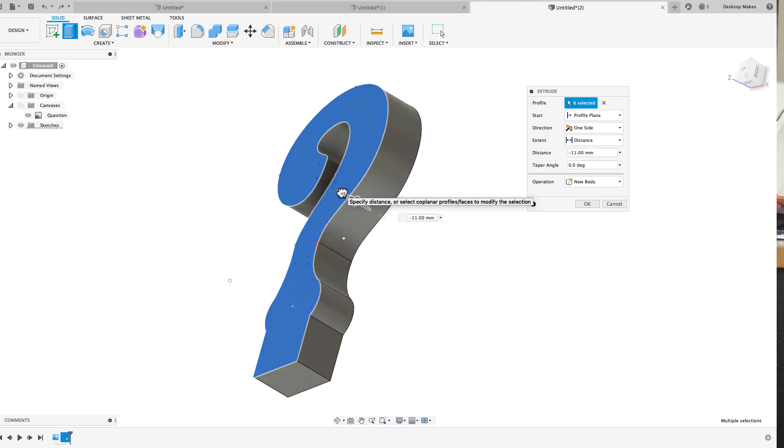Now I'm trying to figure out what to do, and then I realize, wait, I have a 3D printer, and I can definitely design one of these. So I buy a cake, go home, fire up Fusion 360. It literally takes me 5 minutes to make the question mark design, and an hour later, I'm holding it in my hand. It looks way better than what they would have had at the store, and I was able to print it in colors that matched the cake.

And the sweet bonus is that I made it. And if you've been there, you know that exact feeling. I love this project because it's a great example of how my 3D printer has saved me countless times. And I have so many stories like this. All right, let's go into the design and I'll show you how I approached this and how I was able to print it in 2 colors with a printer that only has 1 extruder.

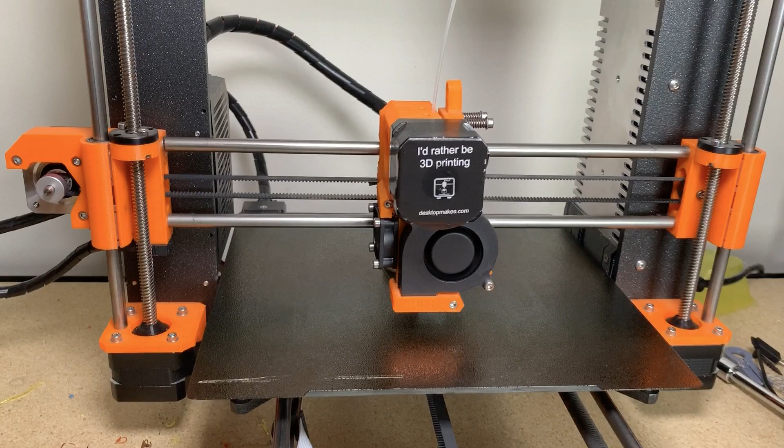I printed this with my Prusa i3 Mark II, and as you can see I went with the clear filament for the first part, and I'm going to come in with the orange for the second part. So the printer head's going to move out of the way, and then it's going to unload the old filament, and I'll just put in the new filament and hit the OK button, and it'll purge some of it out. And you just have to make sure to come in and clear the rest of the filament so it doesn't drag it back to your print.

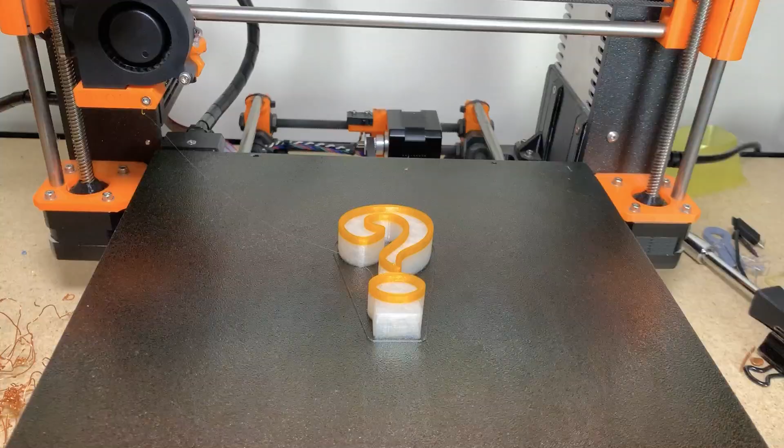And then it just continues, and it does a really good job of just picking up where it left off. The beeping you heard before is what it uses to notify you when it's ready for a filament swap. So it'll keep beeping until you actually come in and change the filament. Here's the finished print, and I really do love these flexible sheets that allow your prints to just pop right off. Makes life so much easier.

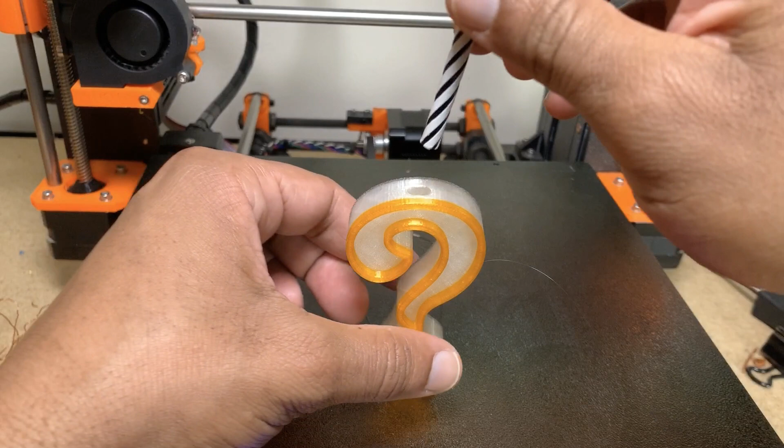And as you can see, I modeled this with the little hole on top, so then you can just come in with a regular candle and place it on top. And this has already gotten me thinking of all sorts of creative and funny ideas for candle designs instead of what you usually see out there. All right, let's jump into the design now.

I find it's a lot easier to approach these types of designs by bringing in an image and tracing it rather than just trying to tackle it from scratch. So what I did is I went on Google, found the image I wanted to use, and then just saved it to my computer. So now all I have to do is go to Insert, Canvas. I'm going to go to Insert from my computer, and it'll go to my folder. If not, just navigate to the right folder. I'm going to select my image and click Open.

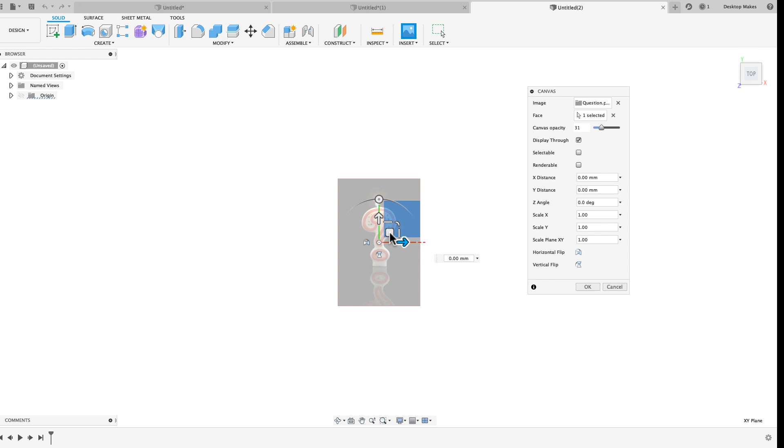And now all I have to do is select the face. I want this on my XY plane, so I'll select it. And let's go to a top view so I see what I'm looking at. There's my question mark here. I'm just going to move it about over here. The only thing I changed here was just to bring that opacity down to about 30. Somewhere in the 30s is fine. And then I'll click OK.

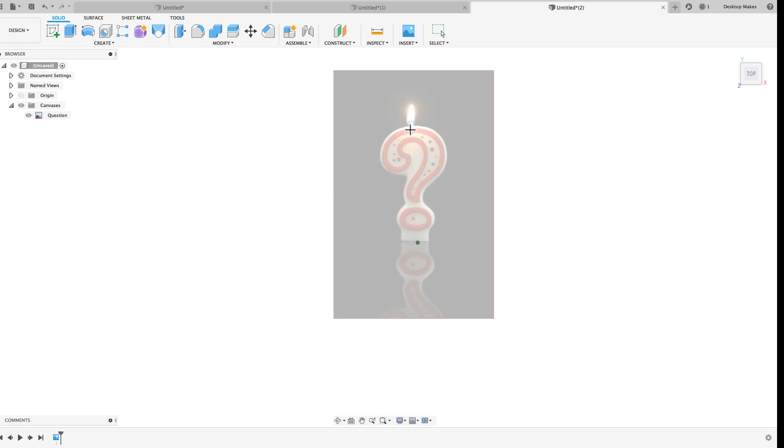And now I have to calibrate it, so I'm going to expand it here on my browser. Right click, go down to Calibrate. And I'm just going to select the bottom and the top and enter what I want that to be. So I'm going to go with 80 millimeters, hit enter, and then let's zoom out. Okay, I'm going to turn on my origin here to see where it is, and I'm just going to move it a little bit.

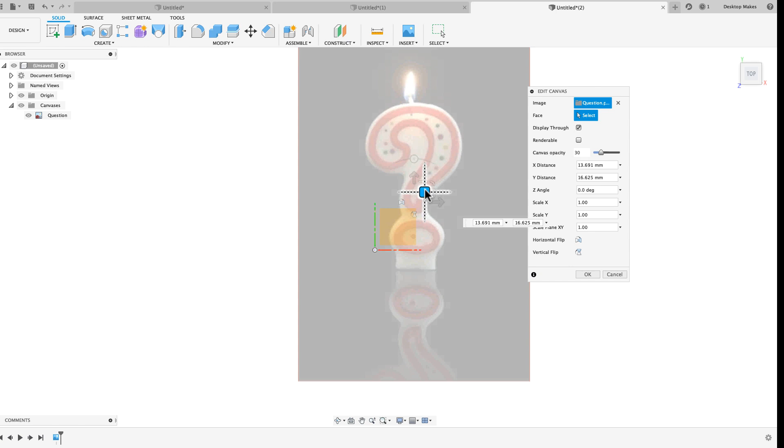So I'm going to right click on my canvas here, right on that image, and I'm going to go to edit canvas, and then I can just grab it. I'm going to position it about right here, just so it's on the upper right hand quadrant here of my x-axis. All right, I'll click OK, and now I'm ready to begin sketching.

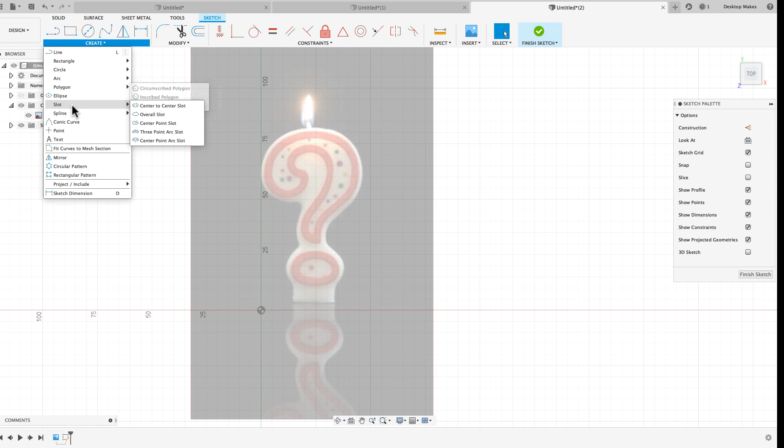So I'll go to Create, Create Sketch, select that XY plane, and I'm going to grab my spline tool and simply trace over the question mark. So let's go to Create, Spline, Fit Point Spline, and I'll zoom in a bit. And I'll just start around right here, and I'm just going to place points just on major curves.

And you've probably seen me use the spline tool before. You know, it's one of those things that you really just have to start using it to get the hang of it. But you can see that once I click back on that first point, it closes that profile. So if I hit escape, I have this profile here. And now I can go in and tweak these points. So I can grab them and move them.

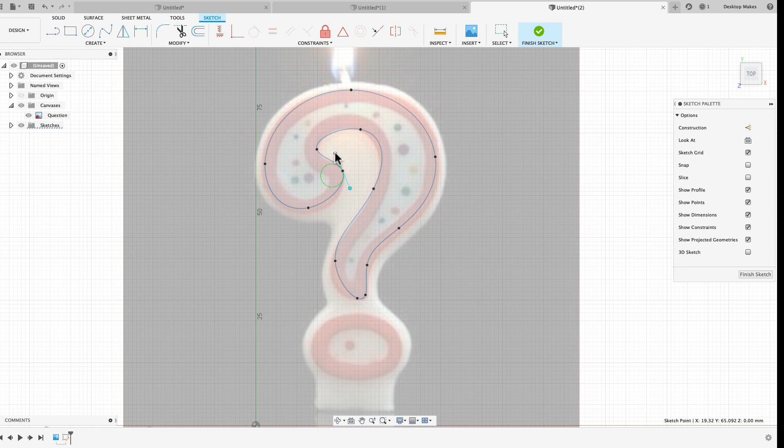And if I click on it, I get these handles. If I want a sharp edge, I could just bring that handle close in and it gives me a sharper edge there. And then I can just go around tweaking these. So I'm just gonna move these around, just getting it to match the profile. Now it doesn't have to be perfect. I'm not looking for perfection here, just to get the general idea. So I'm not gonna go too crazy with it.

Here's a tip: if you find that it's snapping into different points or to your grids, you can hold the Command or the Control key, Command on a Mac, Control on a PC, and it'll give it the smooth movement you see here so it can stop it from snapping.

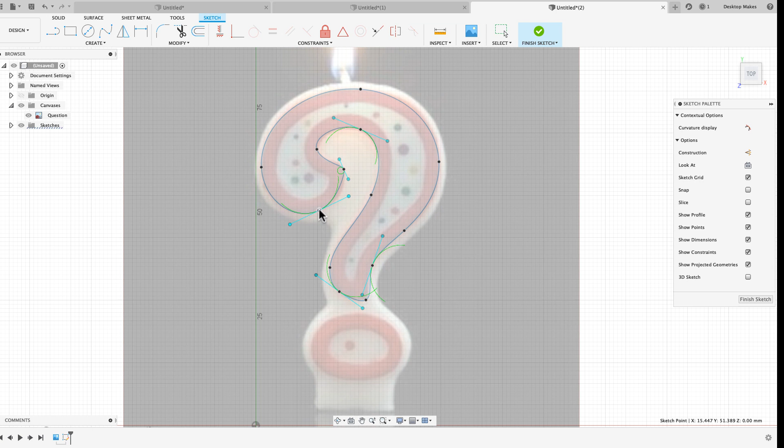Okay, once I'm happy with this overall shape, let's go down to the circles here. And to create those, I'm just gonna go with the ellipse tool. So create down to ellipse. I'll eyeball my center point here and then just move my mouse up to give it my height and then out to give it my width. Hit escape, and then you can actually come back and adjust these points here.

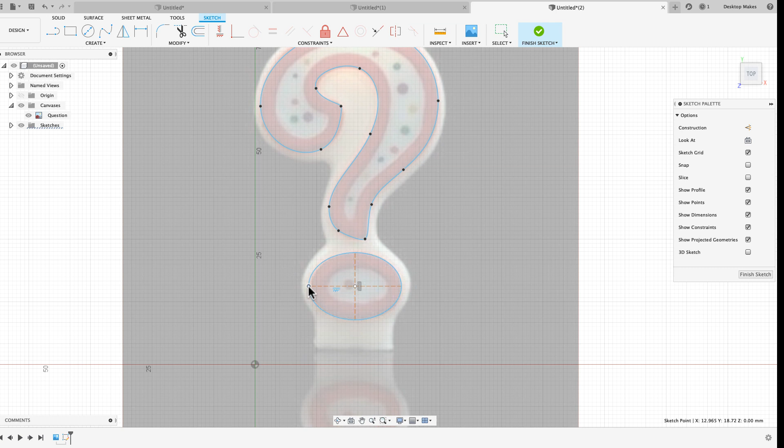Okay, now that I'm happy with the overall outline here, I'm going to grab my offset tool by going to modify, down to offset, click this top outline here. I'm going to give it a 2.5 millimeter offset, and there it goes. I'll do the same thing with the bottom here. Right click, just go up to repeat offset, click the ellipse, and you can see if I start dragging it in, it's a negative offset, so I have to make sure to enter that negative number, negative 2.5. There we go.

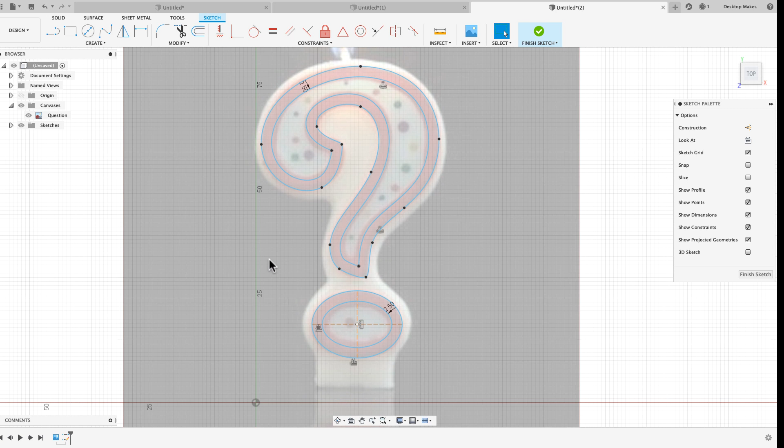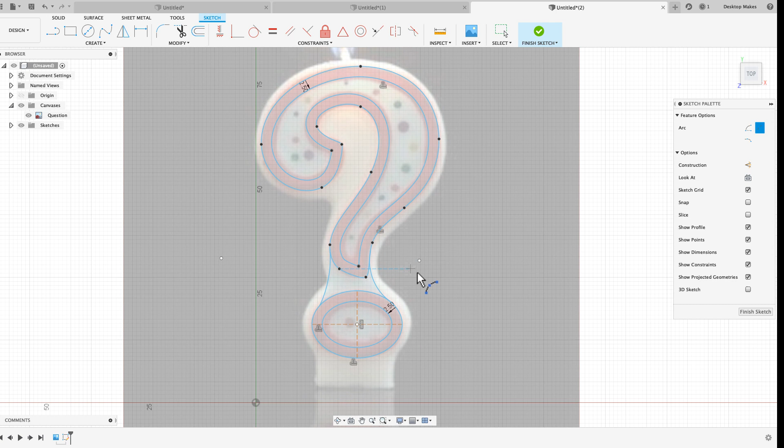Now I'm going to take a different approach. Instead of this whole white part around the question mark, I'm going to simply attach the top to the bottom part using a couple arcs. So I'll go to create, down to arc, 3-point arc, and click on the ellipse here. Let's see, grab a point here and then a point right here on the question mark, and then I'm just going to bring that in a little bit and do something like that. Do the same thing on this side. And that's fine.

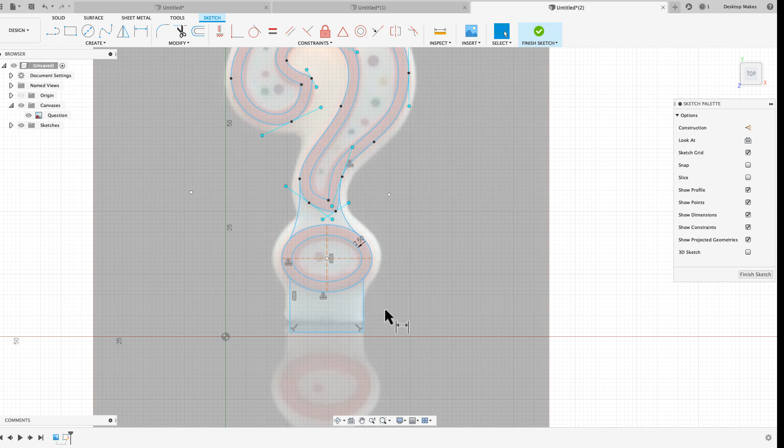And now I'm just gonna do the bottom part. This is the part that actually goes into the cake. So let's grab the line tool, and I'll just grab somewhere over here, come down, go across, and then back up. Okay, now I have that little rectangle part that's going to actually have it sit. Let's hit D, and I'll check the distance on this. It's about 13 millimeters, so that's good enough. Okay, so that's pretty much what I need here.

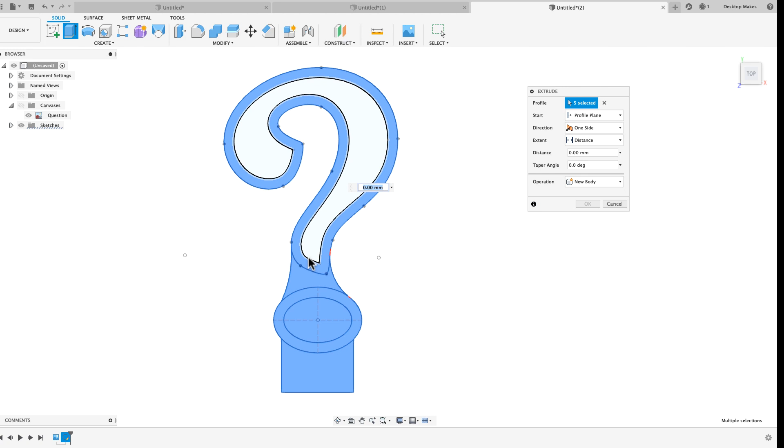So I'm gonna go to stop sketch, and I don't need to see the canvas anymore, so I'll untoggle that visibility. E for extrude, and I'm gonna select each one of these profiles, and then I'm gonna extrude this down. I went about 15 millimeters, so I'll do negative 15 there. And let's bring back the visibility of that sketch. And E again for extrude, and this time I'm just gonna choose that outline, and I'm gonna extrude in the other direction.

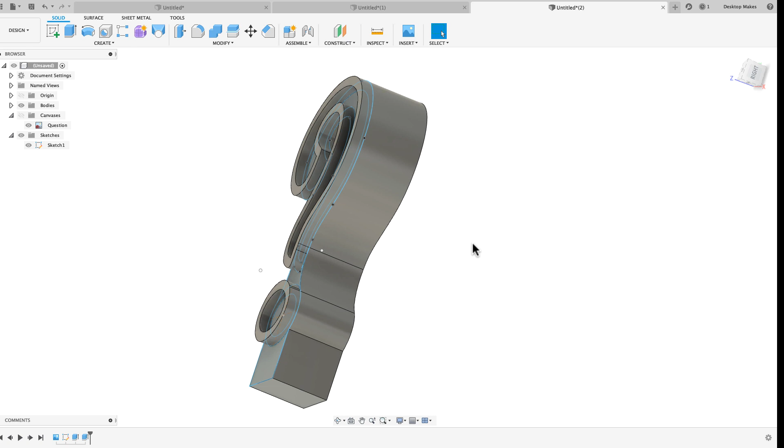We'll go 3 millimeters and click OK. Let's remove that sketch again, and there is our question mark. Now to print this, I want to do it in 2 different colors so that the outline here can actually stand out and we'll see a question mark. So let's make it look like how we're going to actually print it.

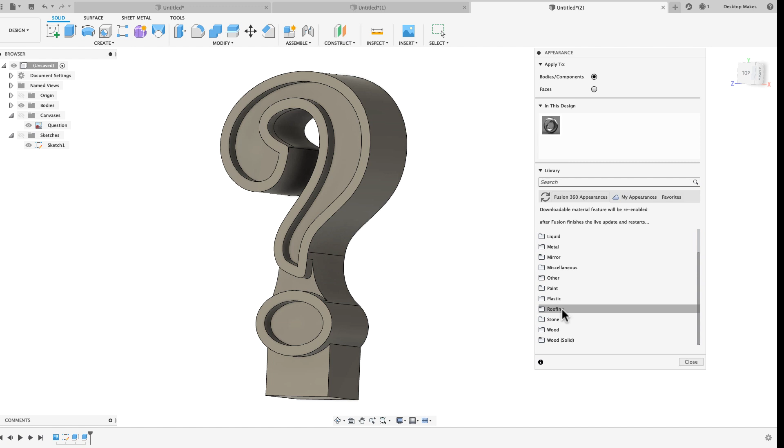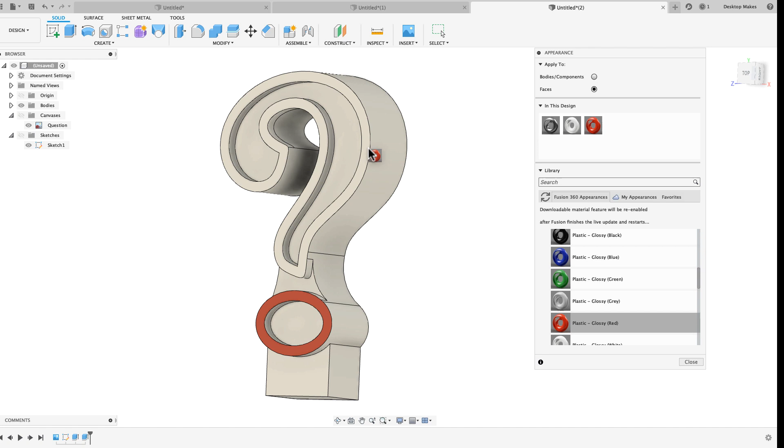I'll hit A on my keyboard for appearance. I'll get this appearance dialog box. Let's go down to plastic, and I'll click on the glossy folder here. I'll grab a white, and then I'm going to grab a red, but I just want this top face to be red, so I'm going to change this from bodies to faces, and I'll go ahead and drag that over. So it's going to look something like that, and actually the inside part is also going to be red here.

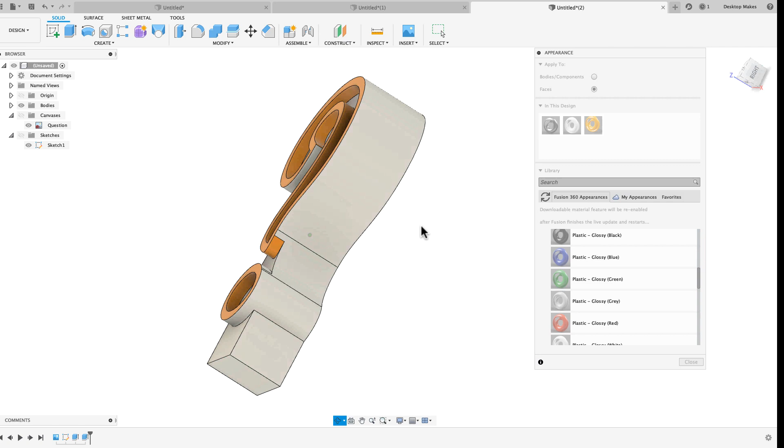Okay, then I'll double click up here on that red. I'm actually going to make it orange because that's the color I'm going to make it, because we're doing a carrot cake. Okay, and it's going to look something like that. It's a little bit different because this whole part here would be a different color, and I can tweak that right now by using my split body tool to make it more accurate, but that's going to give the general idea of how I want this to look. So, all right, now I'll show you how I'm actually going to set it up in the slicer.

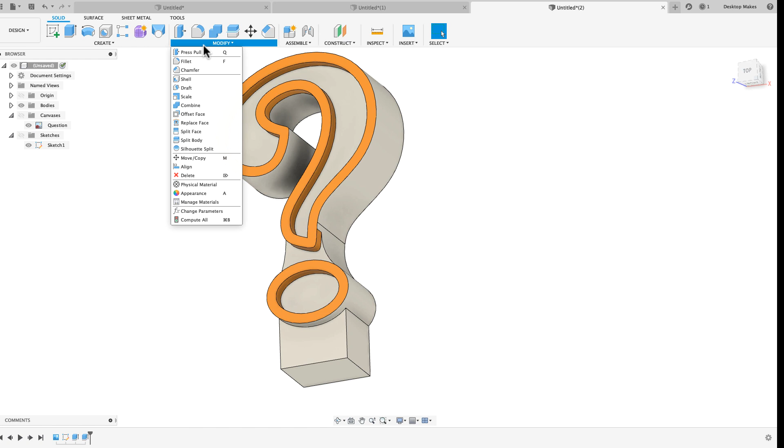Actually, before I do that, let's apply a fillet to these bottom edges here. I'll go to modify, down to fillet, and I'll select this edge here, and you know what, let's do these 2 as well. So these 4 total edges, and I'll do a 1 millimeter fillet, and then I'll click OK.

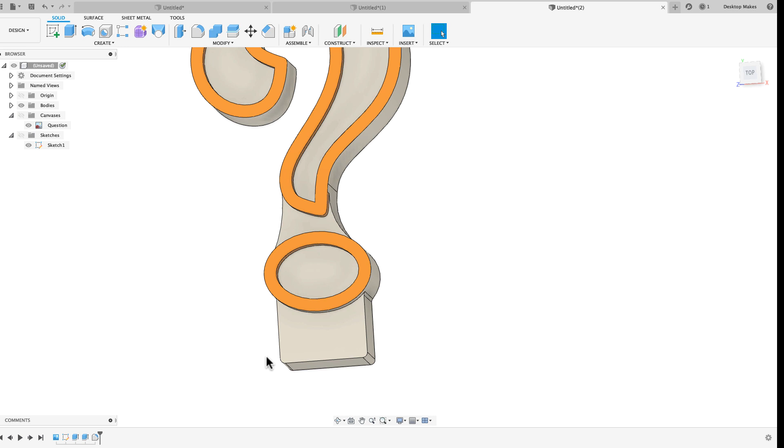Now the reason for that, if your model can allow for it, is when you're 3D printing you won't have these abrupt changes. It just allows for the print head to move smoother if you put these fillets in here. So it's just kind of moving and not having to stop and then turn. It'll allow for just better results.

I realized that I forgot to put our hole on the top where the candle is gonna go into. So the idea behind this design is that we're gonna have a hole on the top, and you're not gonna actually light this 3D printed part. You're gonna put a regular candle on the inside. So, all right, let's do that really quick.

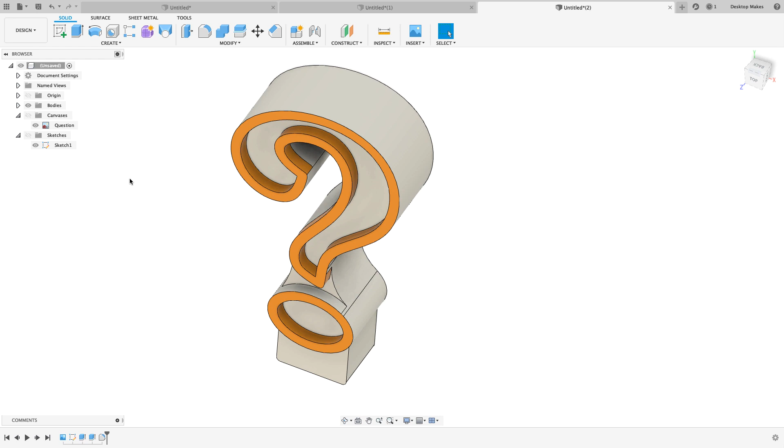I'm gonna start that by creating an offset plane. So I'll go to construct offset plane, and I'm gonna grab this ZX plane here. I'm going to take that arrow and just drag it up right on top of my model here. So bring that down just so that it lies right above it. Click OK, and then we'll create a sketch right on that plane. And we're right on top here.

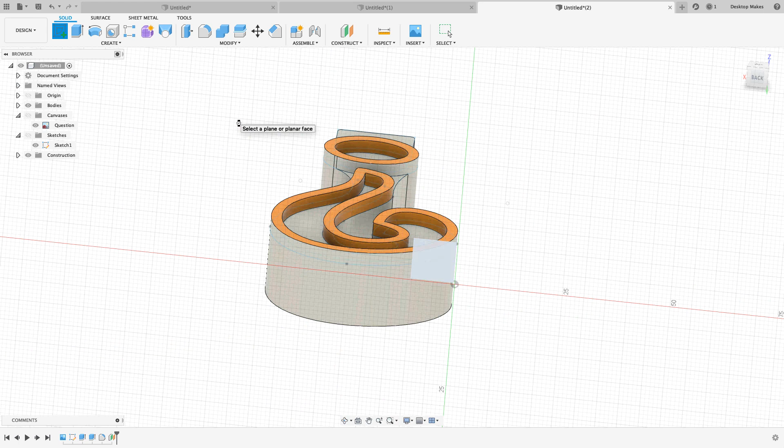So I'm going to hit P on my keyboard for project. And within this little dialog box, I'm going to choose bodies, select my body, click OK. And I'm going to draw a circle. I'll go to create and then we'll go down to circle. I'm going to go with the center diameter circle. Just create a circle up here. I'm going to go with a 6mm diameter. And since I projected this outline of the body here, you see it in purple.

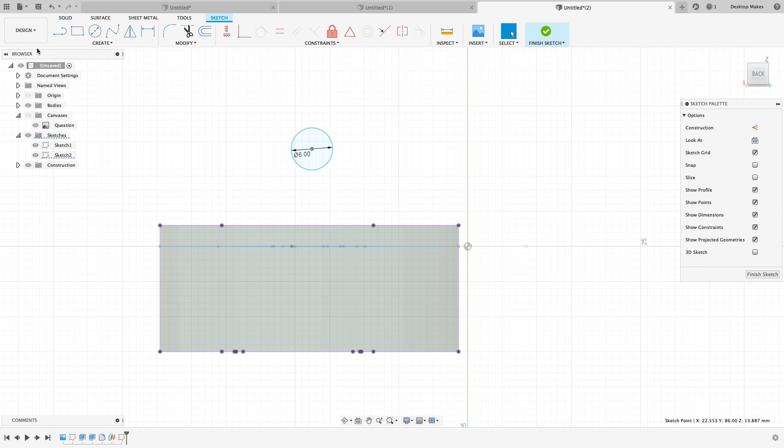And the fastest way to get this circle centered, I think, is going to be to draw a line. So I'll grab the line tool under the create menu and then just draw a line across from diagonal to diagonal. Hit escape, select that line, and I'm going to hit X on my keyboard to make it a construction line. And now I'm going to grab my midpoint constraint here, click on my circle, and then click on this line, and it's going to bring that circle right to the midpoint of that line.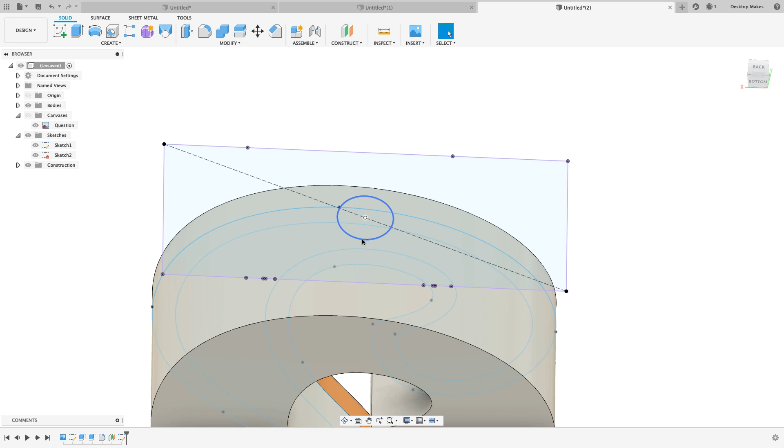Now I'll hit stop sketch. Let's bring that sketch back into view so I can see it, and then I'm going to select that circle there, E for extrude, and let's just go all the way down.

Well, we won't go all the way, we'll leave a little bit of material here so that we don't poke through. I'll click OK, and we can untoggle sketches, and that's my hole there. That's gonna fit my candle. Okay, now we're ready to 3D print this.

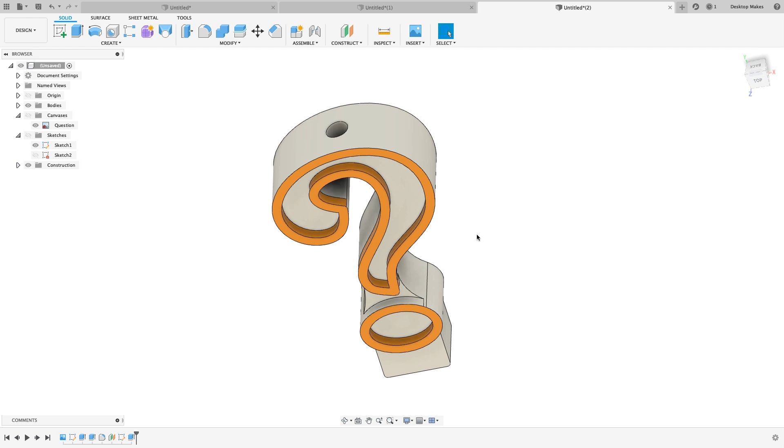To 3D print this, I'm gonna go to Tools, Make, 3D Print, select my model, and I can either export it as an STL file, or I'm gonna directly send it to my Prusa slicer here. So I'm gonna just click OK. Now any slicer can do this part, but since I'm going to be printing this with my Prusa, I'll just bring it into the Prusa slicer. And the Prusa slicer actually makes it pretty simple if you want to print something with 2 different colors and you only have 1 extruder. I'm going to show you that right now.

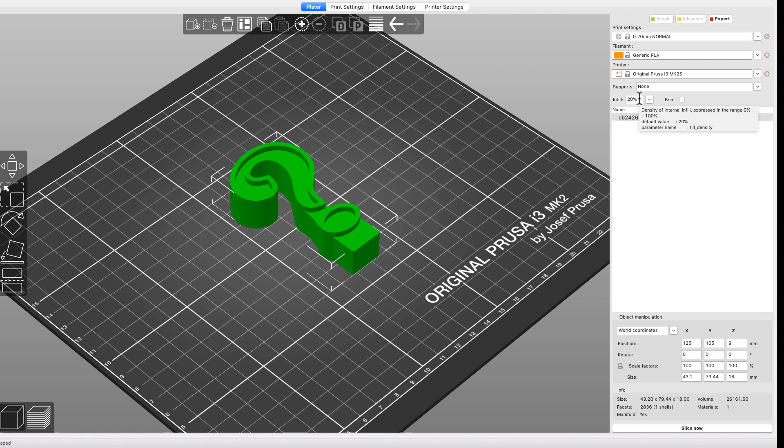So with my settings here, I'm going to leave it at 0.2mm. We're going with PLA. Here's my printer. Infill 20% is fine. So now I'll go to Slice Now. And you can see I can drag this little slider up and down, and it gives me a nice simulation of what's going to happen. Now what I have to do is just simply go to the layer that I want to change filament. So I can see here, this is where that layer starts, where it begins printing that outline. So that's where I want to start.

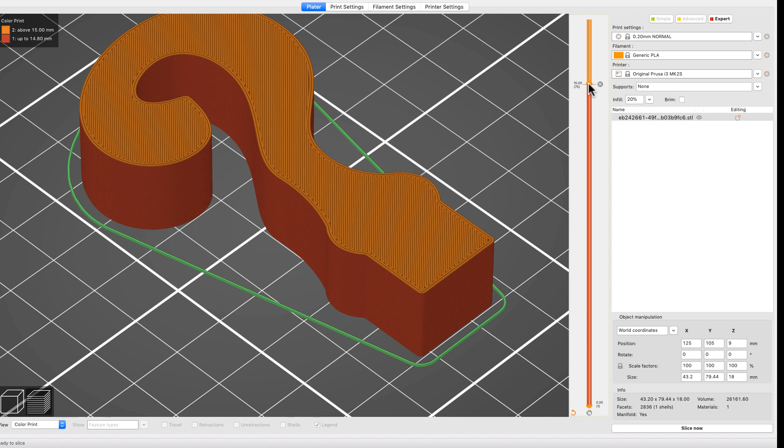Now you want to avoid, here's a mistake I did at first. I started at this layer here, and you pick the layer by clicking on this little plus sign, and then it adds a little mark right here. So the first time I did it on that layer, and what happened is it then printed this whole part here orange, and it didn't give me that distinction I wanted. So to remove the layer, you just bring it back down. You find that little X here, and you click on it. So I'm just gonna hit the up arrow on my keyboard, and then I see that's where that outline starts. So now I'm gonna hit the plus sign there.

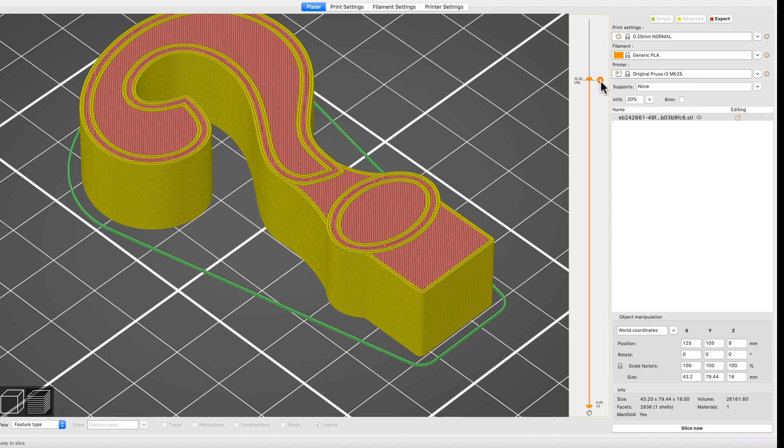Now when I drag this up, you can clearly see that this is red and this is orange. Now these colors don't mean anything. You can change them. It's really just going to depend on what color you decide to actually put on your printer. So as I'm printing, it'll be going until it gets to this layer right here. And once the printer gets there, it'll actually stop. It'll beep to let me know it's ready, and it moves the extruder out of the way, and then it unloads the filament. It'll have me put in a new filament, tell it when it's ready, and then it'll just simply continue printing with the new filament. So it makes the process really easy and straightforward.

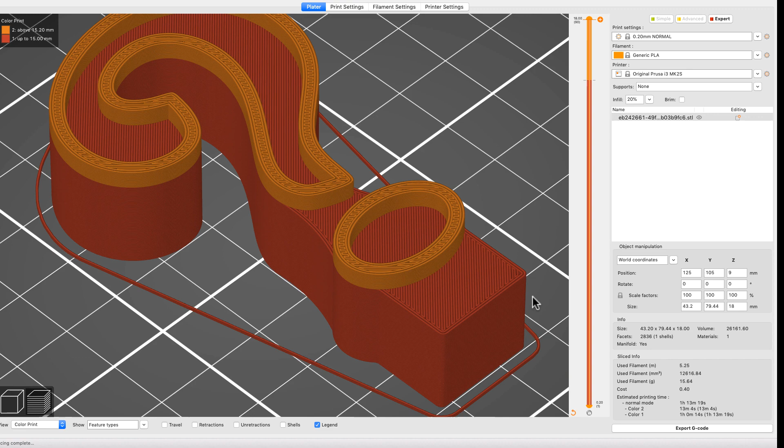Then all I have to do is click Slice Now, and then just export my G-code. And I like the visualization here that it clearly shows you exactly what's happening.